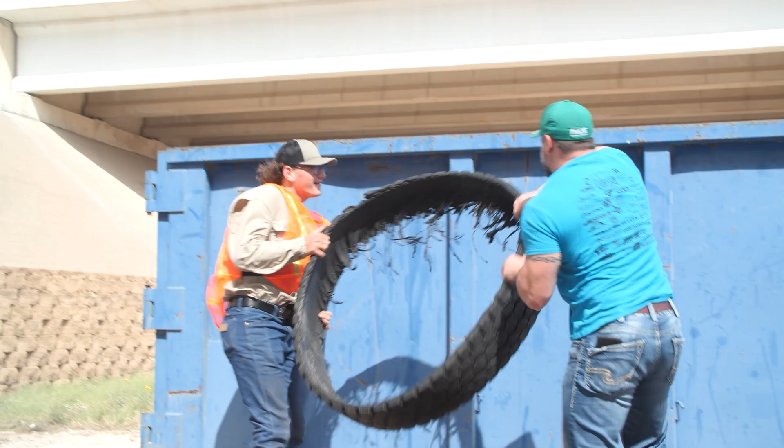All right, let me kick this off with the first few slides. So basically what we are is an EPCM company that takes you everything from order to delivery to installation to maintenance. But the main reason we're on here is our technology, which we have patented and tested over the last couple of years.

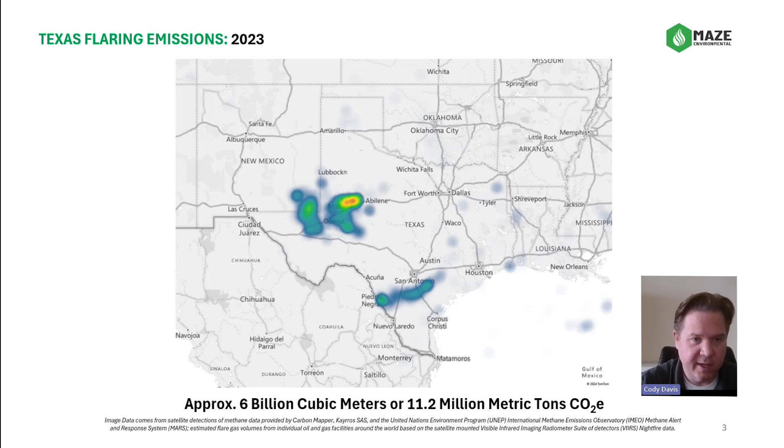What we have done is take all the flaring locations across Texas, and it looks something like this, which everyone can recognize by the different basins. This attributes to about 6 billion cubic meters, or 11.2 million metric tons of CO2 equivalent, in just 2023 alone. What Maze is able to do is, if I could press a button and install Maze at every location across Texas, it would take Texas from this down to this — a significant impact on getting to a much brighter and cleaner future.

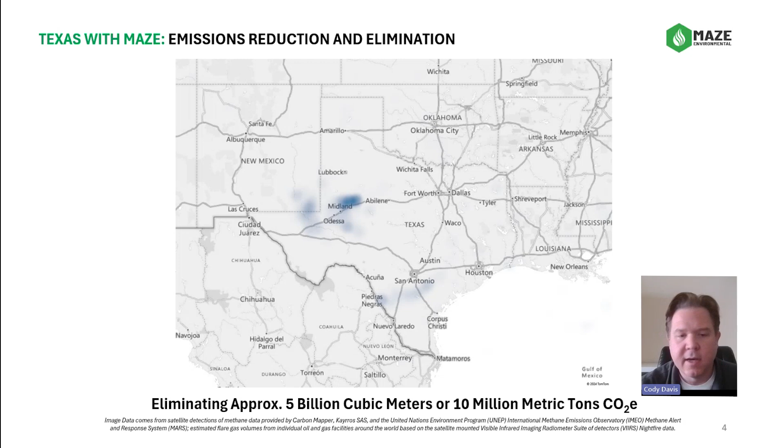Yeah, absolutely. Thanks, Cody. So we started this technology to help operators reduce their tank emissions, and we've been able to pilot this technology across a few sites already. We started implementing it in early 2021, and we've had a lot of progress since then.

We've realized that this technology can help a lot of different areas, and instead of just reducing your flaring, it can also help you recover a lot of your lost production that a lot of people are losing via tank hatches or bleeding and flaring. With that lost energy, the more that I study it, the more I realize how much energy is getting lost. Instead of losing it, we try to capture that and put it back into sellable profit, such as your oil or gas pipeline.

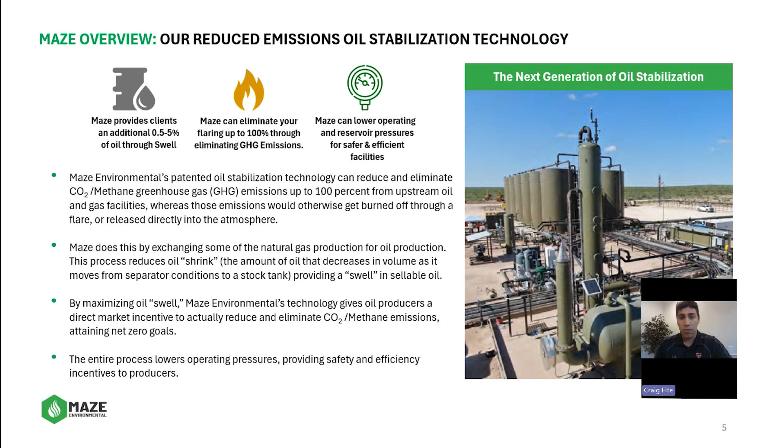One of the other benefits that comes with this technology and reducing your flaring emissions is lower operating conditions. We all know safety is first priority when it comes to these facilities, and we keep the operator in mind when doing so. So we lower your operating and reservoir pressures and make it a little bit safer out there, and also get rid of your flaring.

So part of what I do is I help with the HYSYS simulations. Whenever we start meeting with a client, we'll gather data from them, do a site visit. I'll gather process flow conditions and operating conditions and show you exactly what your facility is operating like today as we talk. We call that the base case.

Then I will implement our technology into the simulations and run a Maze case, essentially. So we'll showcase the two different cases, how you're currently operating and some of the areas that we can help with, whether it's trying to recover lost hydrocarbons or reducing flaring emissions.

So here on the screen, you can see one of our technology showcases that we did in the Permian Basin. This was on a 10,000 barrel a day case. On the base case, our plant was flaring 181 MCFD of gas a day. With our technology showcased in the Maze case, highlighted in green with our Maze oil stabilizer, we were able to reduce that down 100% to reach 0 MCF.

And with that also came an uplift of 2.75% of oil production. When we say swell, we basically mean a decrease of oil shrinkage. As we all know, through the oil conditioning process, there's going to be some shrinkage, usually 2.5 to 4.5% across your oil conditioning process. In this case, we took it down almost 3% and recovered an extra 248 barrels a day.

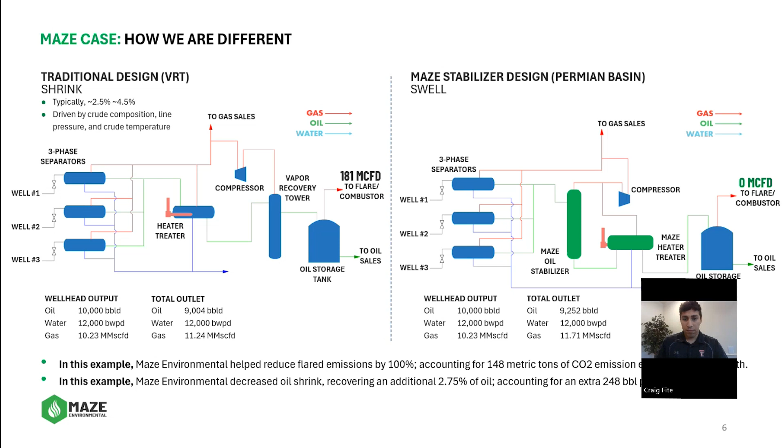Now we realized that this wasn't the best fit for everybody out there. Everyone essentially is doing the same thing, trying to produce oil, but they have different site setups, whether it's an old site or a new site. So we wanted to develop this technology a little bit further to be able to be implemented basically anywhere.

So we developed another system, which we're calling the Maze Vapor and Liquid Recovery Tower, the VLRT. Essentially this system is an identical setup to a traditional vapor recovery tower. It looks the same and operates the same, goes in the same placement. It's operator friendly, controlled the same way a normal VRT is, except you get the benefits of the Maze system. It's 90% more effective than a traditional VRT, and you can still decrease your oil shrinkage.

Now, our tower is not based off of retention like a normal VRT is. What our system is designed around is fractionation and absorption. So you don't need the same kind of retention time that a VRT does, which some people design to have retention times of 5 up to 30 minutes. Our technology is actually not based around retention, so you can implement a much smaller tower.

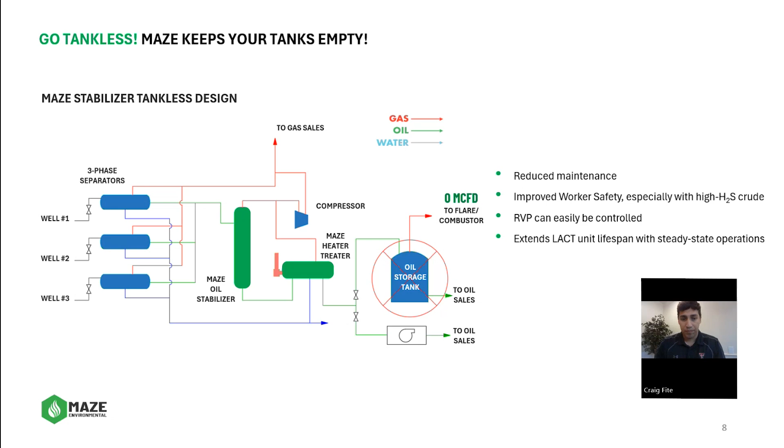Now, we've done this at a few different pilot locations. For this analysis, we went out and developed a whole field for a client, installing stabilization units on these production facilities, ranging from 1,500 barrel a day all the way up to 11,000 barrel a day facilities. We're grouping together and showcasing the elimination of GHG emissions we're able to get in just a short amount of time.

As we were building these facilities, in the first 9 months, we were able to see a 98% reduction across the field with their emissions eliminated, which calculated up to almost 10,000 metric tons of CO2 that we were able to save from emitting into the atmosphere.

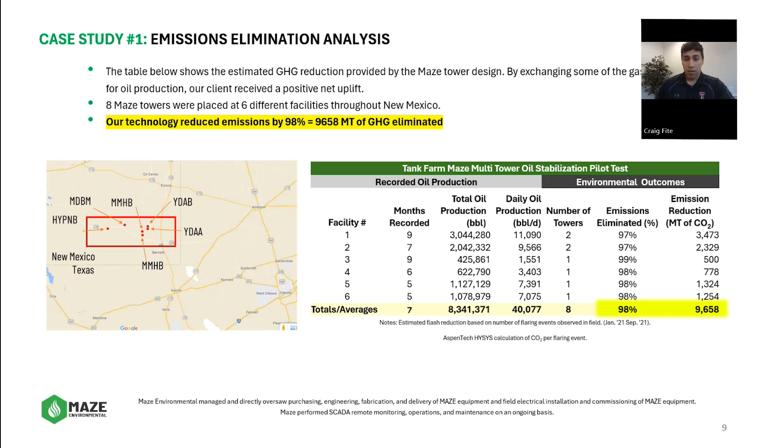Now, we wanted to take this analysis even further and look at the second benefit that oil stabilization provides you, which is an uplift in production.

So we wanted to look at just what one tower was doing on one location and monitor that. We set up a pilot location outside of Midland where we ran and operated for 11 months with 99% runtime, and we were able to swell their oil about almost 2% on average across those 11 months, accounting for an uplift of 31,000 barrels of oil.

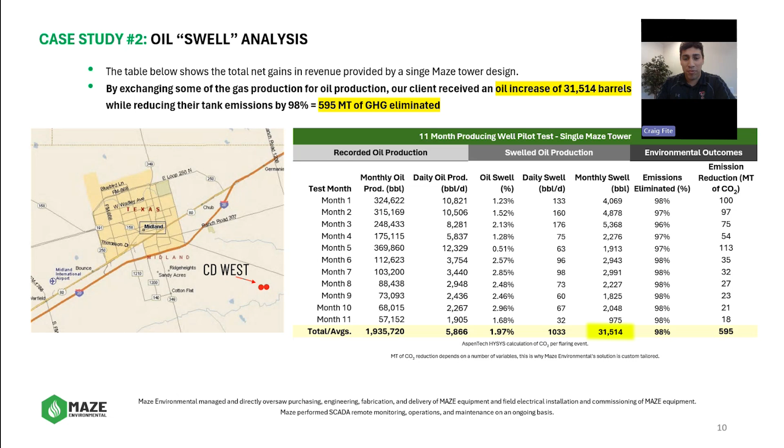You can do a quick calculation of what 31,000 barrels of oil at, just call it $65 a barrel. And Craig, if you're curious, a couple minutes ago it was at $72.91. So even more, 31,000 barrels times $72 a barrel. You can see what we were able to provide this client in uplift.

Using Craig's HYSYS models he's pumped out for various clients and how they do their different tests, we got curious what Maze would look like if we implemented it across the United States. If I could tomorrow wave a wand and do it up to the 2030 goal of ending zero routine flaring, and we managed to get a hold of the data of how much we flare in the United States. Just implementing Maze alone across the United States, if everyone had it by 2025, we're eliminating something like 102 million metric tons of CO2 by the end of 2030.

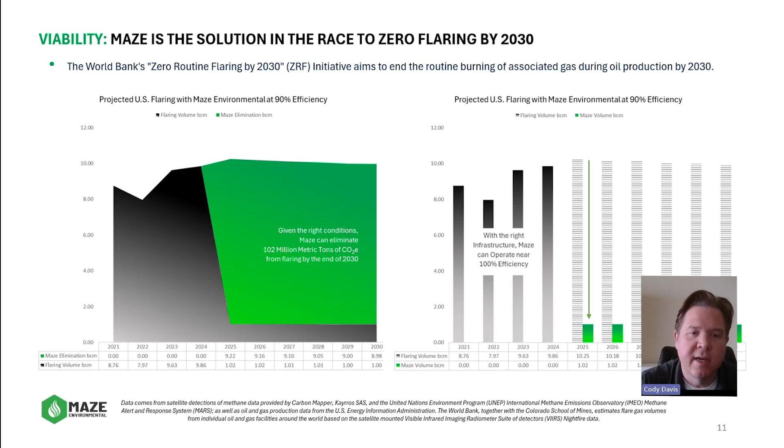And that's not even the cool part. I think it comes back down to we are swelling an additional 385 million barrels of oil from the swell alone. When I talk to non-oil interested persons, it's more about, well, what does that mean? Are you taking more oil out of the ground? And Craig, no, you're not. It's the oil you have, you're swelling it up and you're selling more of it. And that's where the cool part comes in with this technology.

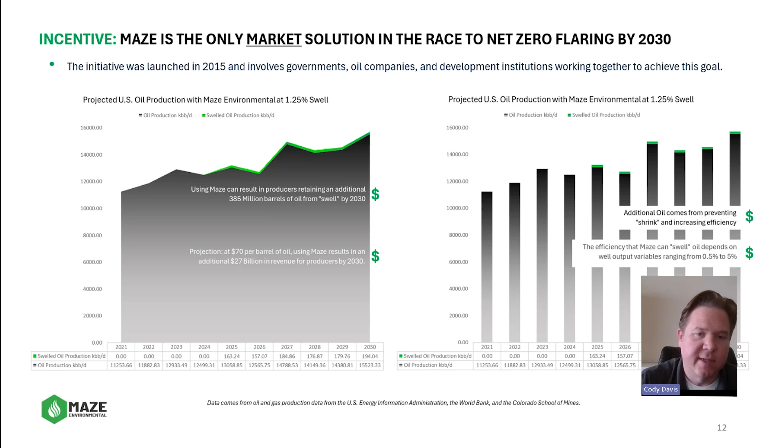Brooks or Craig, do you want to go over how we deal with the client and what they want to do in the base case and the maze case? Yeah, so this goes back to, or I'll let you take it, Brooks. No, Craig, I was just going to say go ahead with it. You just got back from a couple of field tours and site visits.

Yeah, so that's generally how we'll start. We'll talk with the client and see where their problems are and what they're trying to do, depending on their location, how strict they are with regulations, or if they're just trying to make a little bit of extra money. I actually just got back from doing a couple site tours out in Midland. So it'll start with gathering process data to be able to run HYSYS simulations and showcase the different types of technology.

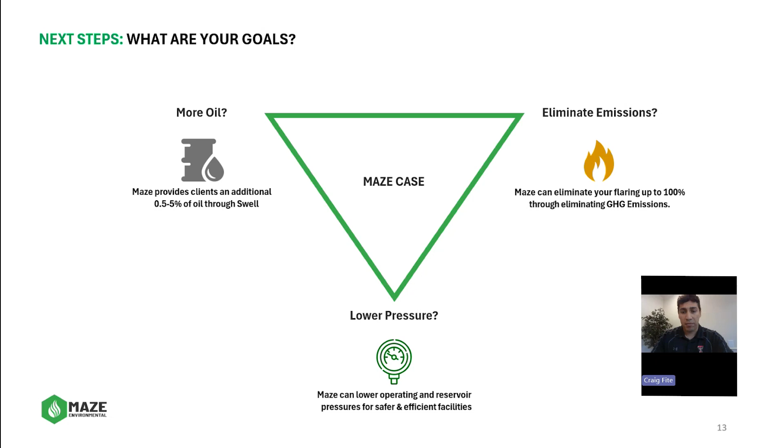Wherever you're trying to fit on this triangle, whether you're trying to eliminate your emissions or capture a little extra money, trying to recover your hydrocarbons. A lot of existing technology tries to capture your emissions. What we're actually doing is eliminating those emissions so they're not even coming out of the oil. There's no need to capture all that, and that's how we're able to get a little bit more extra oil out of it. You don't have to pick just one of these goals. It can be just one, and we can maximize it, or it can be all of them. That's correct. It's based on the client's needs, but we tailor the same equipment with different operating conditions. Whether you want to maximize one, we target to hit all of these areas.

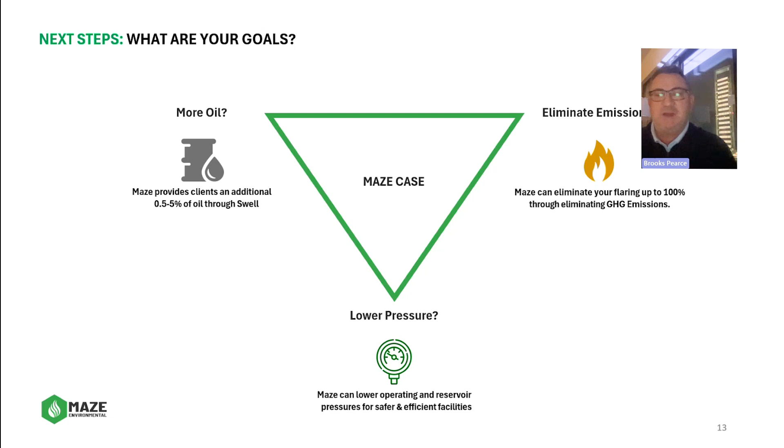Can I add a little bit to that? When we're doing these facility run-downs, because of our background and experience in production and facilities, we don't just look at what we're doing, we look at everything they're doing on location. Any chance or opportunity we have for them to lower horsepower on pumps, or drop horsepower on VRUs to take power down off the grid, that's something we also look at for them and bring up as we're going along running our base cases.

Craig, why don't you sum us up here real quick, and we'll look at some of the technology being developed right now for one of our clients here in a second.

Like Brooks was mentioning, it's a simple solution. We make it easier for operators and oil companies to implement our technology and give them real solutions for their issues, ranging from eliminating emissions up to 100% to improving safety with reduction in operating pressures and reservoir pressures. We understand it takes a little money to make some money, so we prioritize our return on investment, where the increase in production revenue helps you recover the costs of implementing this technology and operating it. Not only that, but improving your ESG score. We know that's a big issue with environmental regulations coming more into play as months progress, so we fit all of those areas into our technology to help give a real solution.

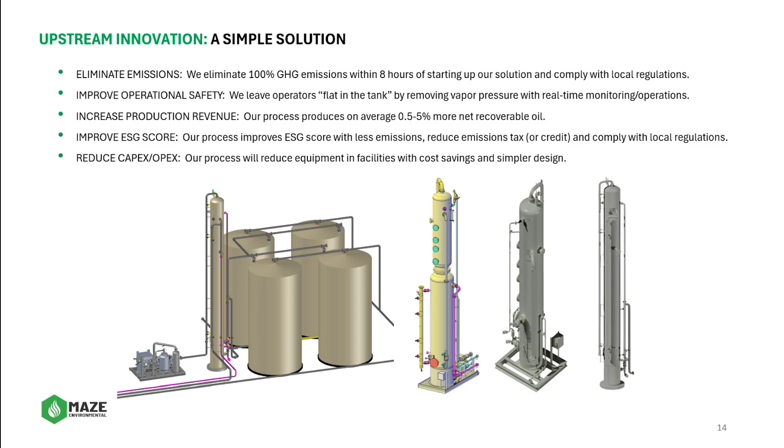What this does is take your crude stream. This is actually built to handle 40,000 barrels a day fluid rate. It works on very low pressure, so it strips out all your light ends while keeping the heavy ends in your liquid phase, to stabilize your crude and recover some of those heavier hydrocarbons that typically go out the top of the tower and into your gas phase.

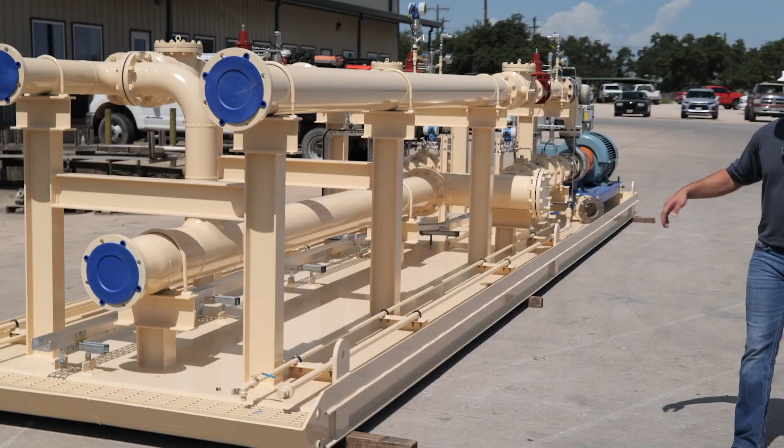Now for our other package unit, since this tower operates at low pressure, we do need a transfer unit — this is where one of our production packages comes into play. This is our fluid transfer pump skid. It has a redundant second pump, so we get zero downtime. This monitors your fluid rate and is hooked up to our stabilization unit to always maintain a positive pressure head on our pump, making sure we have a steady and controlled fluid rate throughout the whole process.

We typically can do one part of the project, or a fully integrated process, whatever our client's needs are for that project.

Behind me we have another one of our builds that we're doing for our client in the Middle East. This is a heat and energy exchanging skid. Instead of having to add or subtract energy with coolers and heaters, we use the existing energy in one process stream to efficiently transfer it to another process stream. We're able to heat and cool down our streams with existing energy in our process to try to minimize our carbon footprint.

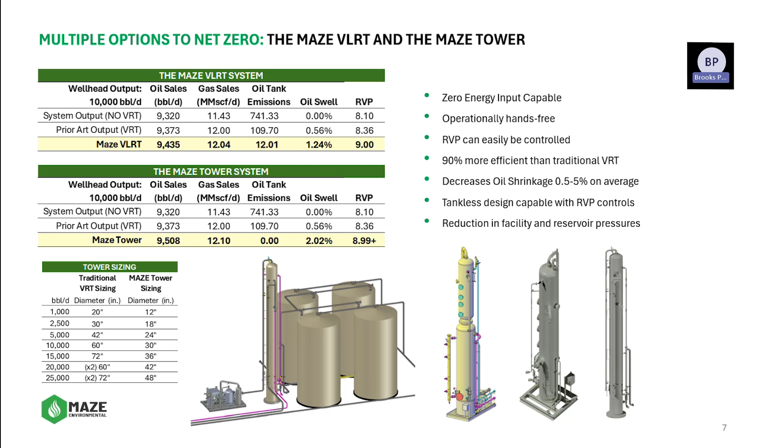Traditional VRT runs off a retention time. We do not, we're more of an absorption tower, so that's why we're able to go tankless. On the screen here, on the left side, we have a split tower that Craig also showed in his video. That's where we can latch onto that, and then we can go tankless right off of it with our pump system. We're not working off retention time, which is the basis of a VRT.

It looks like we have one last question, and it's the simplest question of all: so how does it work? We'll give that one to Craig.

Thanks, Brooks, you kind of went into it with your last answer. It's simple, it's through an absorption and fractionation process, and not retention time. We're basically creating this environment for the oil crude to pass through to not only stabilize the crude, taking off all your methane, demethanizing your crude, but also capturing the heavier hydrocarbons such as your pentanes and octanes, your C3s and pluses that usually go out the top end and get captured, whether it's a VRU or selling that volume down a gas sales line.

That's where your loss of production goes down, or when you're flaring, there's a lot of oil in that stream and a lot of energy that you're losing. Through our absorption process, we're able to absorb those heavier hydrocarbons back into your oil and stabilize that oil so it doesn't come out, whether you're going to an atmospheric tank or down a pipeline to midstream gathering. It's stabilized crude, and in some cases we're able to actually decrease your VRU horsepower, because instead of having that gas stream come off filled with heavier hydrocarbons, it's a less amount of volume. We're leaving those heavies back into the oil, and that's where the benefit of uplift comes into play.